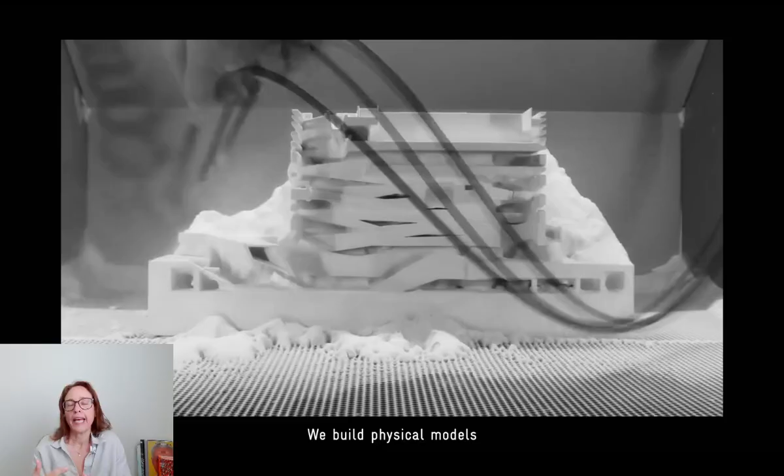The elements of the trade, which are materials, light, spaces and forms, are some of the elements we're using in the language, and their relationship to each other is the vocabulary we are identifying.

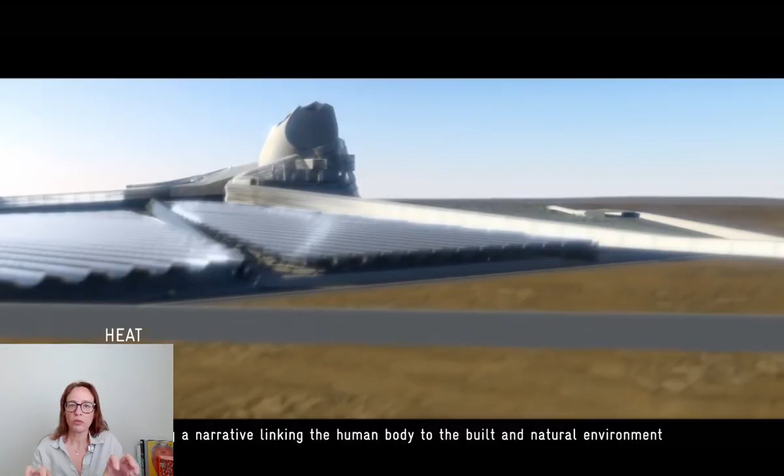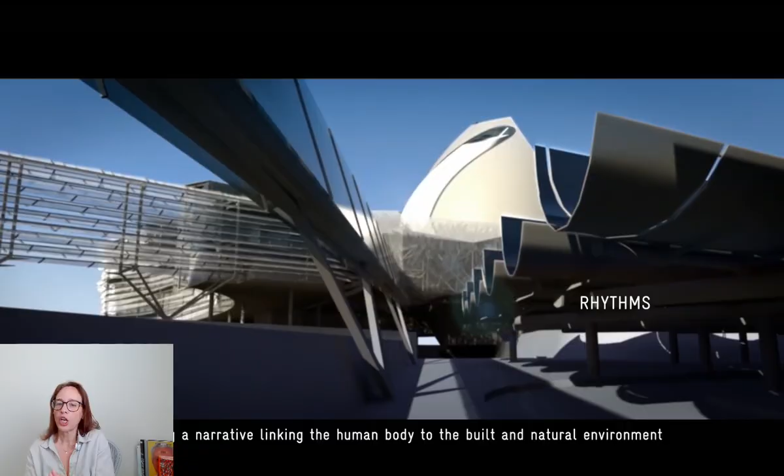So here we're looking again at the natural environment, the built environment, and the human body, and how these three elements come with sets of particular elements. The human body comes in with all its senses, the materiality, the textures, the colors, the surface component, noise—all these are built elements. And then you have the natural elements.

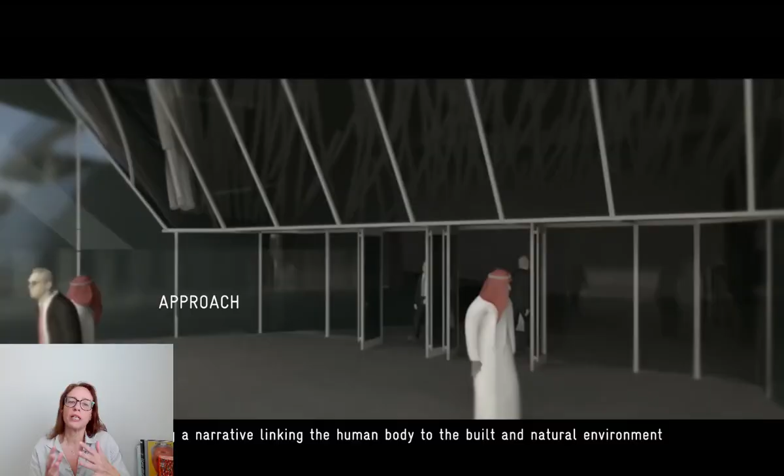We bring the same type of vocabulary but with a completely different meaning: the meaning of texture, the meaning of light, the meaning of transparency. All these things start to come together. They're connected by time, for sure.

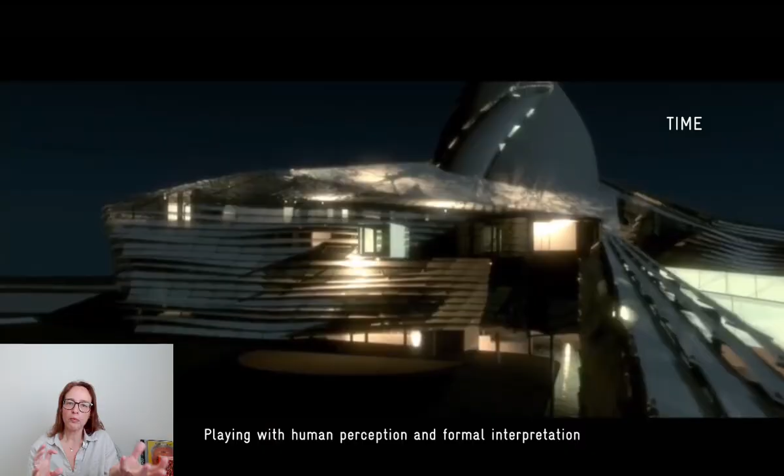And we are now, as the architect, the conductor who is choreographing, putting all the pieces together and organizing them as the environment may change, the built environment and the natural environment. We continue to set the story together and set the different factors together, and their relationship is probably the most important thing.

The human perception is never talked about as human perception in architecture necessarily—at least we don't do that. We'll talk more about how the narrative we're driving through these architectural compositions can begin to be translated into these experiences.

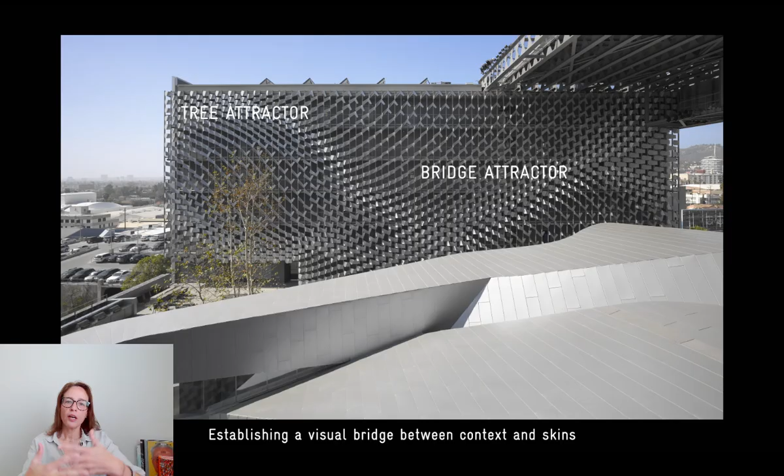The Emerson College, located on Sunset Boulevard in Los Angeles, is an example of using tangible textures and materials to create this wall that resolves two different conditions: an exterior condition with exterior elements, for example tree and bridge, that are starting to affect the mesh or the surface.

Behind that, you have a completely different experience, which is more about spatial and light and movement, and this idea of dark and shadows. The experience on one side is very different than the experience on the other side. But that relax and reflection, for example, those two words are driven by our narrative. And the outside, which is the attractor point, is also driven by the narrative. But then what's in between is that resolution—the architectural resolution.

This is the Kolon One and Only Tower in Seoul. It was also completed around 2018.

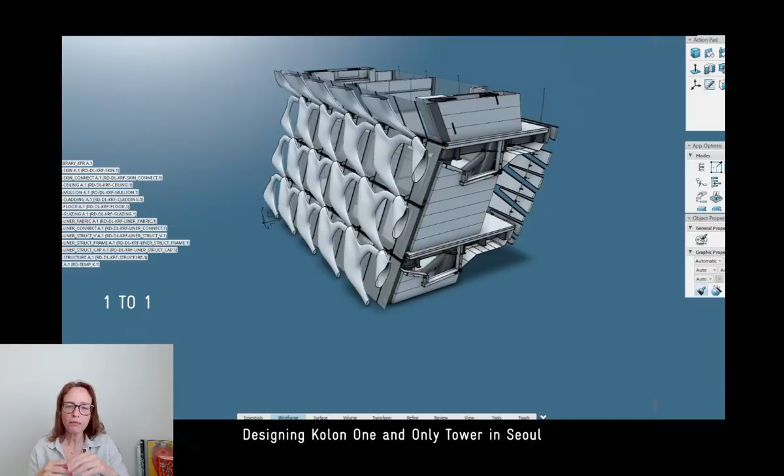Here again, in order for us to try to understand, because as the architecture becomes a little bit more complex, we are developing all these strategies to try to understand what we're making so that we can adjust and articulate it in the most optimized way.

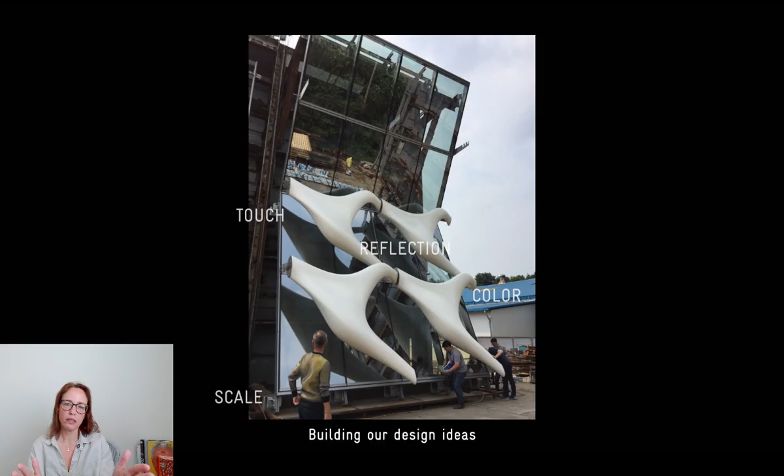So we use digital modeling, one-to-one prototypes and physical models so that we can bring that additional set of discoveries or learning that we do during the process of creation, allowing us to understand an idea of scale, reflection, texture, color, and how once we put all these layers together on the facade and in the spaces, we're starting to read something maybe different.

So a texture of these white bulbous things over a translucent or transparent window, over a walkable space, over this atrium liner that's made of light and forms and shapes—all of these layers together now give you an overly complex element that may be understood in a slightly different way.

Here again, the idea of materiality, reflection, sound reflection, especially in these spaces where we are wrapping stone from the ground to the walls to the ceiling. We're creating this experience through the manipulation of space and material.

Here, the nested egg is basically a stair. That's all it is.

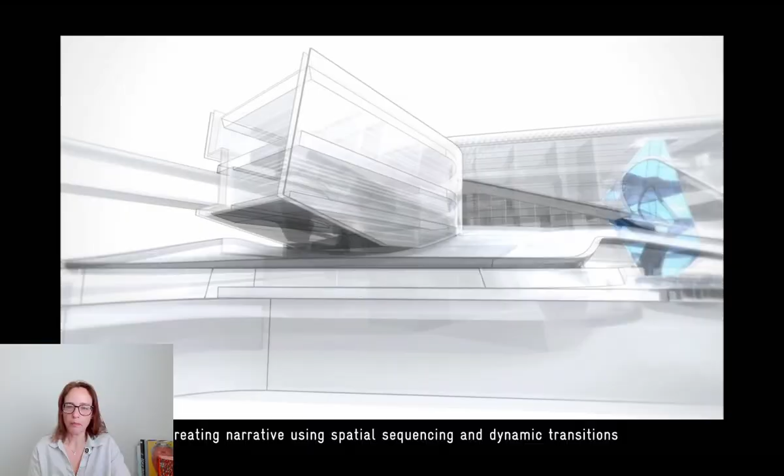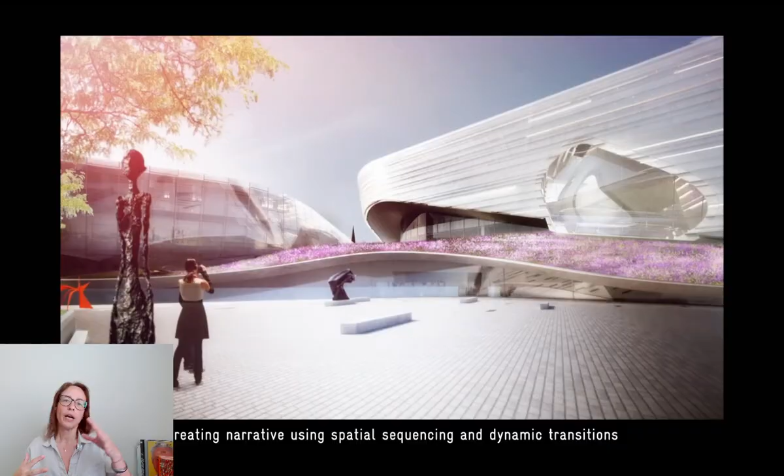But the stair itself is nested inside the egg, and it has an oculus at the top. So throughout the day, the light moves along the surface of the stair. And below, it's hovering above a little bit of water, right? This reflection and shimmering of water starts to create a variety of interaction between the body, the human walking in, and how they're perceiving these sometimes subtle, sometimes more dynamic elements.

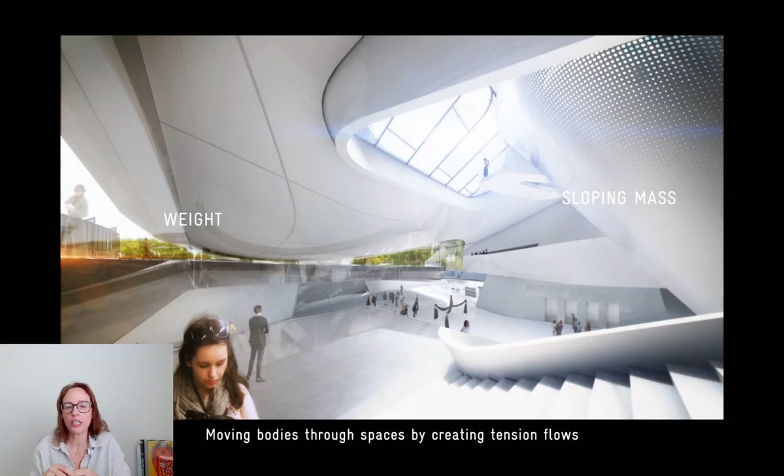Now, the way we shape and mold the architecture, I'm going to explain that in a different video called 01 system. We're going to have three of them. But this idea of manipulating space starts at the beginning with this manipulation of form. And as we move forward, these amorphous or morphed forms that are becoming something as we move towards the resolution of the architecture become more material, more tangible, more physical.

This is the Perot Museum of Nature and Science. Sorry, I mixed it up. And let me go a little bit back.

I want to talk a little bit about this initial element. So this museum is located in Dallas, and it was built, I think we finished it in 2012, so it's even older. But again, we didn't have XR, we didn't have VR, we didn't have any immersives, we didn't have Unreal. Unity was already there, but for this particular building, it's very much based on our experience and also our relationship with the program and the client.

And weaving again a narrative through this. Now, there are building types that are a little bit freer in terms of establishing a certain narrative, and I think museums are that, even though they have to host or contain artwork. So there's a balance between how strongly the architecture interferes with the viewing or experience of the artwork versus maybe in more public spaces where the artwork is not yet seen - the entry, the lobby, the atrium, these other types of space where we can dial up the architecture, dial up the interactive and dynamic relationship between the viewer and the person experiencing the space. That's where we find the moments of play.

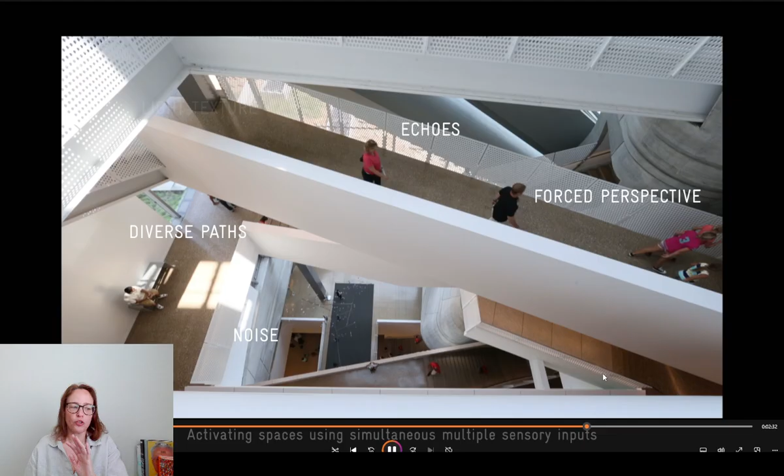And we're also playing with light. So as you're going back into the exhibit space, the cube space, you'll be back into a more toned down, darker, quieter space, because at that point the architecture takes a back step to the exhibit, and that's done on purpose. But this is almost like the palette cleanser when you're going back to this highly activated space again, choreographed potentially because you're following a path, but it doesn't force you. There are always options to get off the path and take another direction. So that's a really interesting architectural composition that's informed in terms of how to express this narrative.